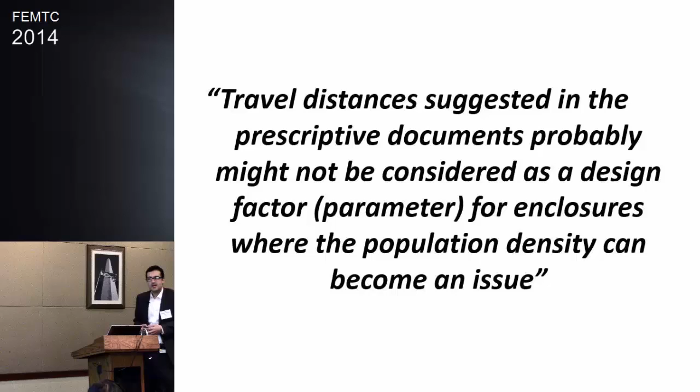Well, so basically what we are approaching in this work is that travel distance, suggested by prescriptive codes, might not be considered as a design factor for enclosures where you have the population as an issue. You see that I'm very careful in saying might not be, because it's, how can I say, a hypothesis.

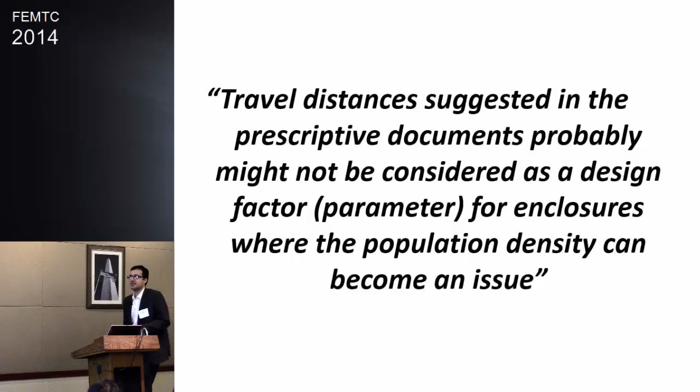This work we have done in 2010, and believe it or not, I haven't had time to publish it. I work as a consultant. Basically, I work installing sprinklers and smoke detectors and starting to do crowd modeling as well. And so it's a good opportunity to discuss this work.

Well, clearly, I think that the paramount word is performance. I think all of us here should believe that performance is paramount. And all these issues are very important, but I'll be concentrating on the time-based analysis, right? Well, clearly, human factors, for example, in nightclubs, you have different kinds of perceptions and awareness, people can be drunk, etc. What I'm trying to say is that although it's very important to talk about human behavior, we will concentrate only on the relation between the people and the environment.

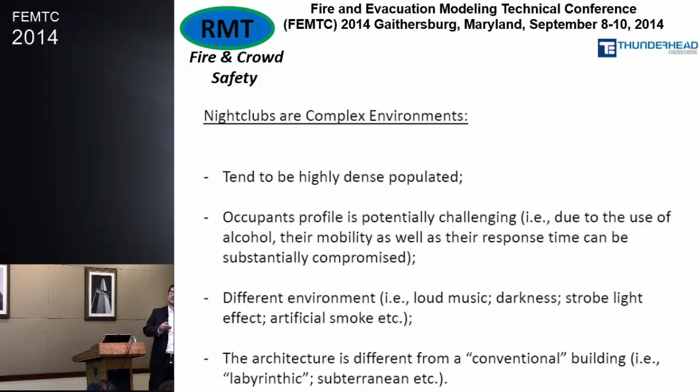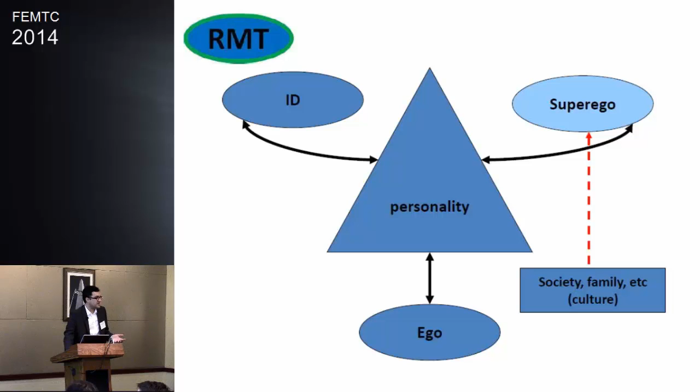And of course, you can discuss later, I know that environmental psychology is very important. There is much research that can be developed, so this can be something to be discussed. Human behavior, if you go into depth, you can even analyze the superego and ego, and this has an influence during evacuation time, depending on the circumstance. But we are not approaching that. I just want to make sure that we are aware of that. It's very important, but it's out of the scope of our work.

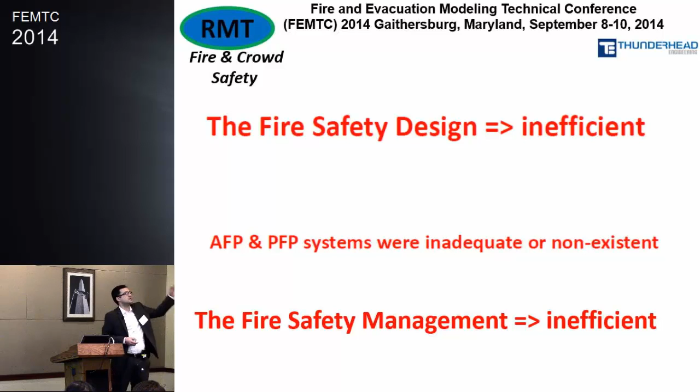So, modeling is a tool, just like a knife. A knife is a tool. I can cut a beef. I can kill myself. It's just the way you use your tool. So, when well used, it can really help a lot. So in many cases, we have seen designs where either the guy used the model wrongly or neglected the smoke detection, sprinklers. So it's not a matter of blaming modeling itself.

And we have so much work that has been produced by NIST and NFPA and SFPE. It's worth reading this as well.

But as engineers, this is very important. Engineers, architects, fire safety standards, they can be the best standard, but they will only recommend a minimal level of safety. And in some cases, the safety might be more complex. And that's where we as engineers should always try to look beyond the black box. So that's very important. Not take this document as a Bible and then follow. Sometimes, it might not be completely accurate.

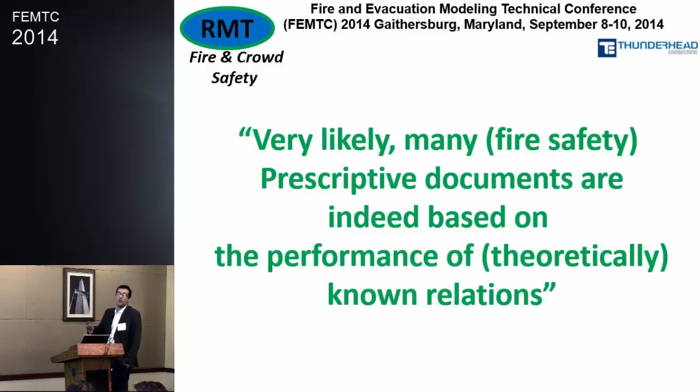Okay, so the relations. Paradoxically speaking, I can also say that very likely many prescriptive fire safety documents can be based as well on performance, you see. So performance is theoretically based on known relations, such as the relation between us, the occupants, and the built environment, and also between all of us and the external stimuli. How I can interpret the strobe or the signs and the fire, the temperature.

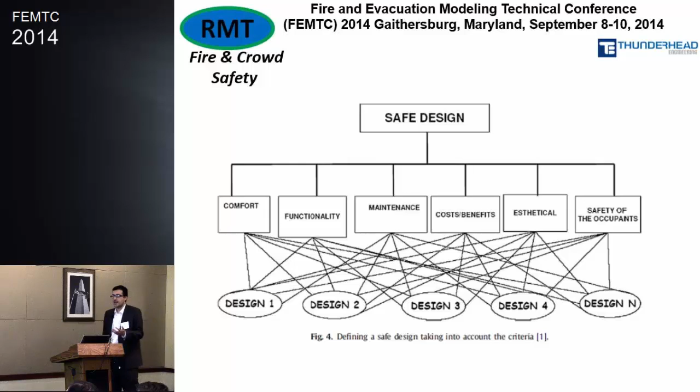And we emphasize comfort, acoustic comfort, thermal comfort, energy consumption, and then we are neglecting fire safety. So we should take into account all these criteria, but have safety as the paramount basis. The reason why I'm saying this is all of us that work with fire modeling, evacuation modeling, active and passive fire protection systems should work together and understand the design, a project as a whole, architects, engineers.

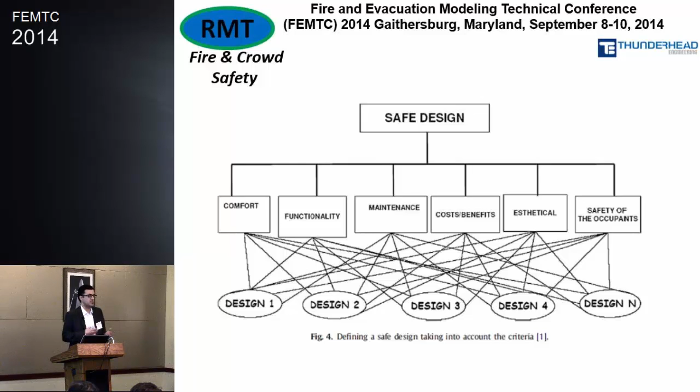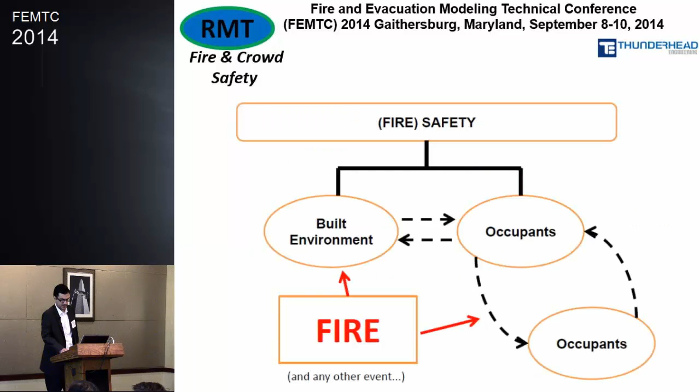Okay, I'll pass that. Our work, although, as we said, human behavior is very important, will be concentrating on the relation between occupants and the built environment.

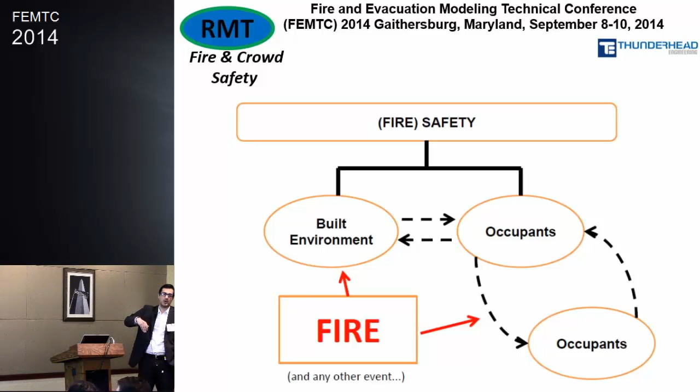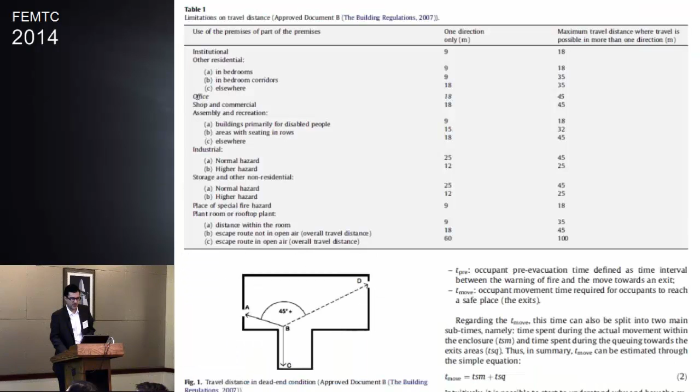All right, so basically, in this study we have used some of our work in the past. We have quite a few works published, journal papers. We have our thesis, where we challenge, for example, the travel distance requirement. And we believe that for highly dense populated environments, we shouldn't sometimes be using this parameter the way it has been used. It's a paper that we have published. You can go to our website, download it and go into depth.

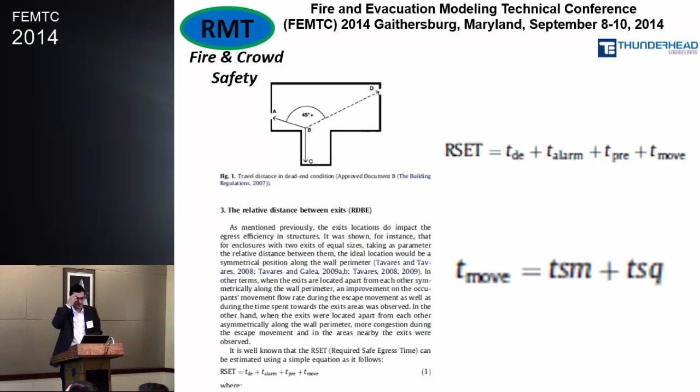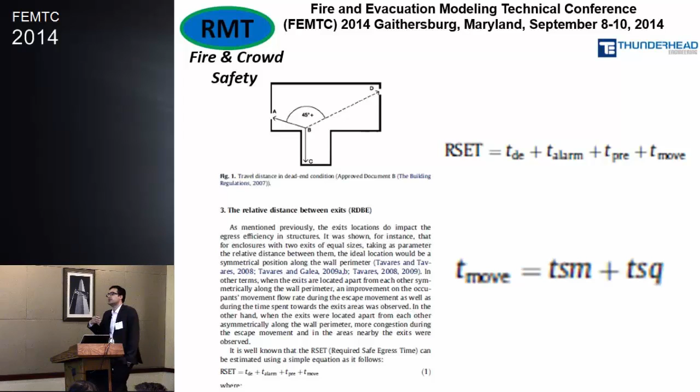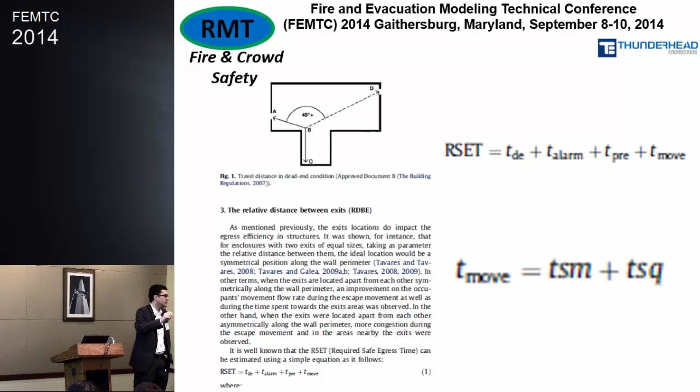So what we are saying is forget about the time of detection, time for alarming, and pre-evacuation time, which is very important. We will concentrate on time to move. The time to move can be understood as a timeline broken down into two small timelines. TSM, the time that we spend during the movement, and TSQ, the time that we spend in the queue. So if you think like that, we can understand that population density will probably play a major role in these relations.

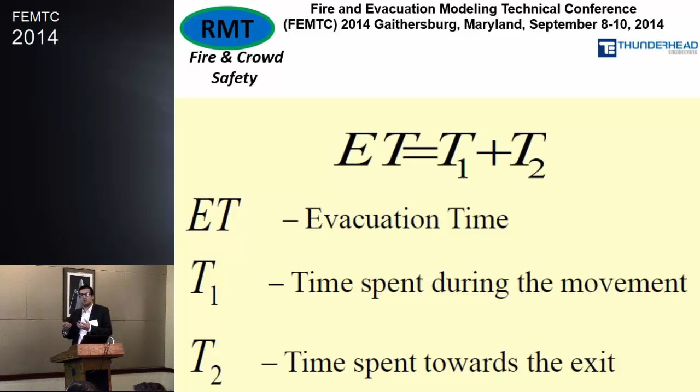There is a work you probably know very well, by Professor Dirk Helbing. He says that faster is slower, and we are going to explain this later on. So summarizing, time to escape, just concentrating on these timelines, is time spent during the movement and time spent towards the exit, the queuing, etc.

I think one of our colleagues here mentioned DOE techniques, and we have done a lot of optimization work based on the Fletcher-Reeves technique, which is a gradient-based algorithm, and also PSO, a genetic-type algorithm, and tried to find the optimal place for the doors. We have done many, many cases. It's also available as well.

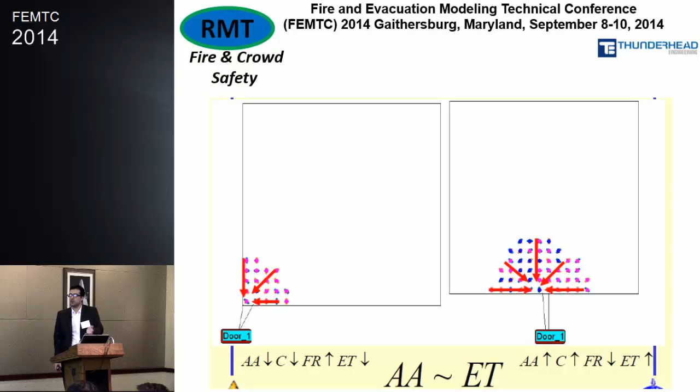You can Google that. But basically, it's well known, but we found and proved that having a door in the middle of the wall is worse for highly dense populated environments. Having the door in the corner will actually improve your evacuation time performance. So we think that when we increase the area of the arc towards the door, we increase the congestion and decrease the flow rate, and then increase the evacuation time.

Okay, so people movement models, as I call them, include evacuation models, pedestrian models, etc. I'm saying this because you model the movement of people. It doesn't matter if it's an emergency or circulation. So you can use them for fire safety engineering, urban planning, crowd safety engineering, etc. There is quite a lot of discussion on LinkedIn about this terminology.

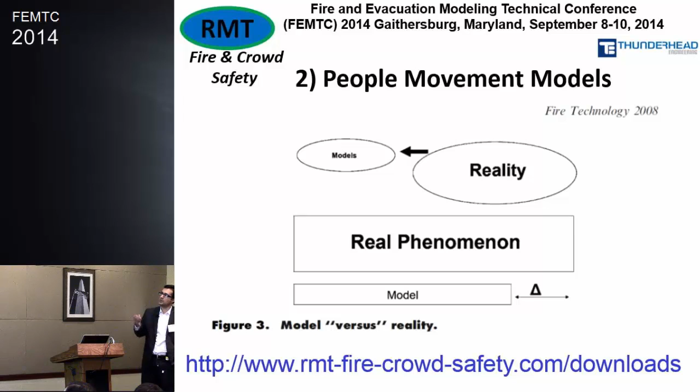Now I want to talk about this issue quickly as well, about the model itself. Well, any model, any function, is attempting to represent reality. And we will always have that delta of uncertainty. That's clear. But if you have a good model, validated as our colleagues have been discussing, and checked, and if you have the understanding about the phenomena that you are modeling, we can reduce that delta substantially. And that's our work as engineers, to look beyond the black box, to minimize this delta of error as well.

So we have some more stuff published. What I'm trying to say is that there's an expression in English: rubbish in, rubbish out. You have these whole protocols which are very important, but the understanding of the phenomenon itself, either fire or an evacuation or behavior, is one of the steps. Then you have to understand the model itself, and then you can model and interpret, just like statistics. You can use it for good or bad.

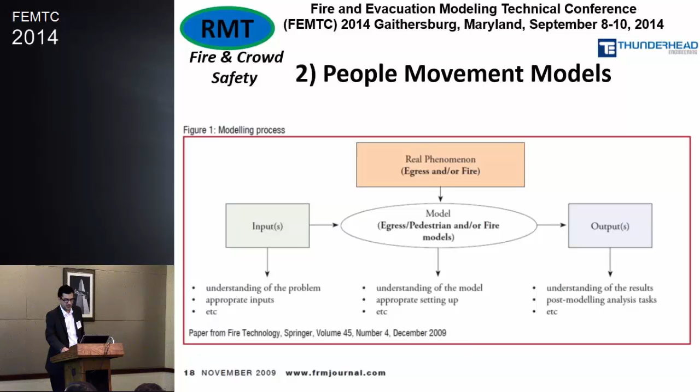So another thing as well is that we can limit our variables. Because if you consider many aspects, well, if you think in a very metaphysical way, life is non-linear per se. A lot of phenomena are non-linear. We try to make it linear to make this easier, right?

So the equation F equals m times acceleration is incomplete, because there are other variables such as air friction and many things, but it works well. If you have an understanding of that function, and if you insert good variables, you can work well. So the analogy I'm making here is how important it is to include some variables or not.

So this is something that maybe some of you researchers could think about from a perspective where, in the commercial field, we might waste time trying to research how ants behave, for example, and make an analogy. It's nice, but it's very virtual, and we have seen these kinds of things happening, with people using this approach for real projects. And because of that, many engineers start to say these kinds of models are mumbo jumbo, they don't work. And we understand that, because it lacks credibility.

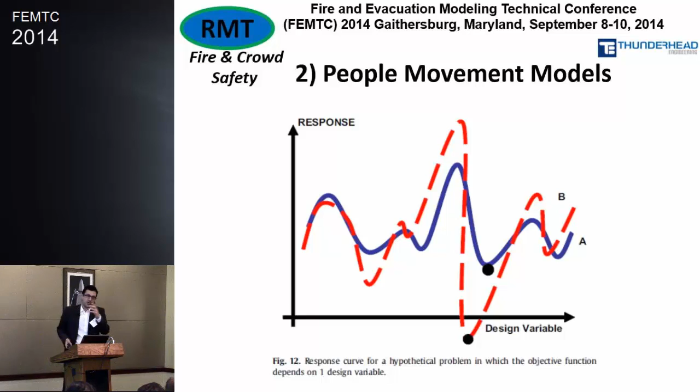So, an analogy with optimization. To know, for example, the global minimum of a function can sometimes be impossible if you have many variables. But if you restrict your constraints, you can find a local minimum, which can be okay as well.

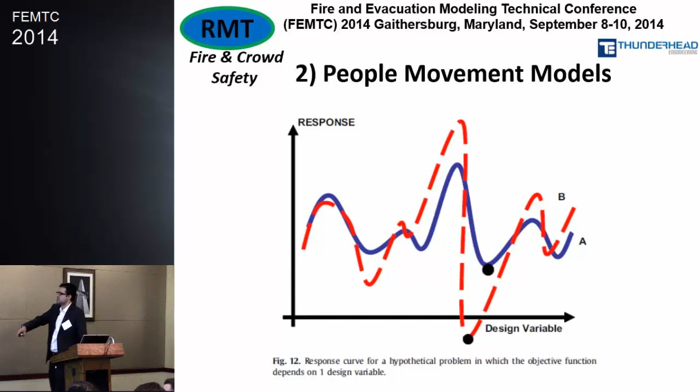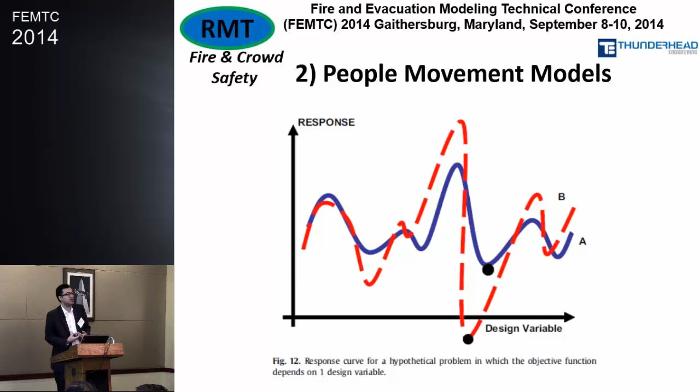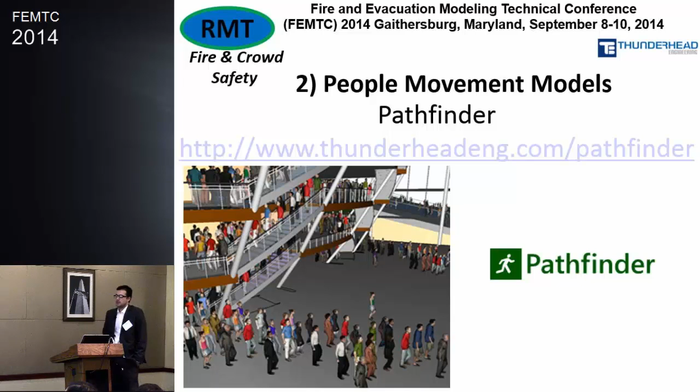Okay, anyway, the model used for this work is Pathfinder. It's a well-known model, well built and validated. You all know this model. And regarding this theoretical approach we've been talking about, there's also a document in Britain that we helped develop, explaining that we can use evacuation modeling as well as fire modeling to help develop the fire safety design or do the analysis for fire safety management. So they are tools. They are tools.

Okay, so let's go to our theoretical work. Basic. Really? Gosh. Okay. Jesus. Okay, I'm going to speak now.

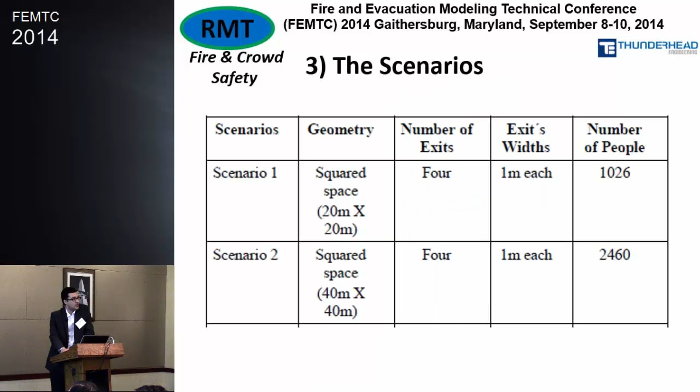Okay, so I have two scenarios here, 1 and 2. It's a very simple case. We populated them, crowded, and we want to check how the door's location would impact the performance of the evacuation.

So that's the scenarios here. It's just simple, you can go into depth on the paper, it's explained better. But basically, we found that the place where you put the door in the middle increases the evacuation time.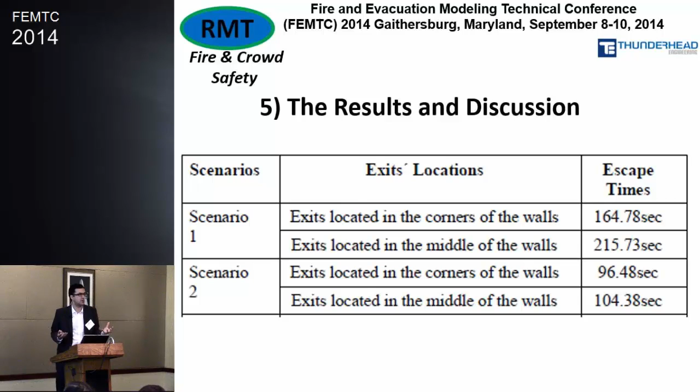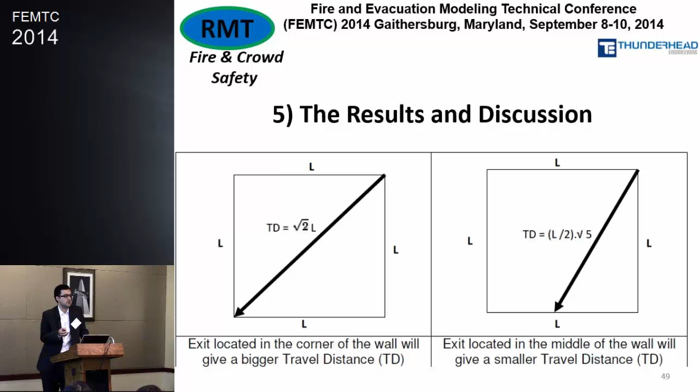And in summary, what I want to finalize is that the concept of travel distance is based, in a general way, on minimizing the distance to the place of relative safety. Well, it works, but there is a variable - the population density - that is a critical factor, and it will completely impact this law, if I can say so.

So we tend to think it's better to put the exit in the middle because it's shorter, more visible. But actually, for crowded environments, it's better to have it spread so people can evacuate in a more ordinated flow.

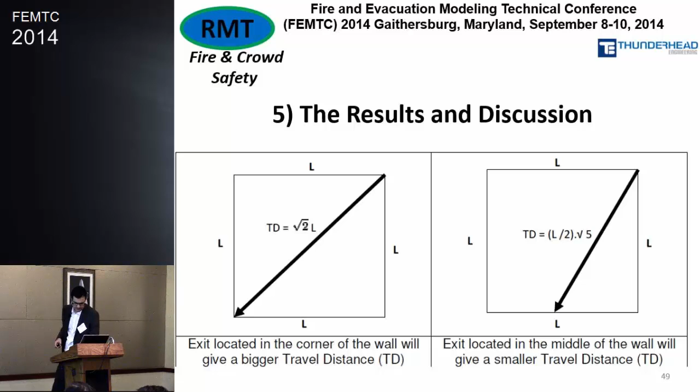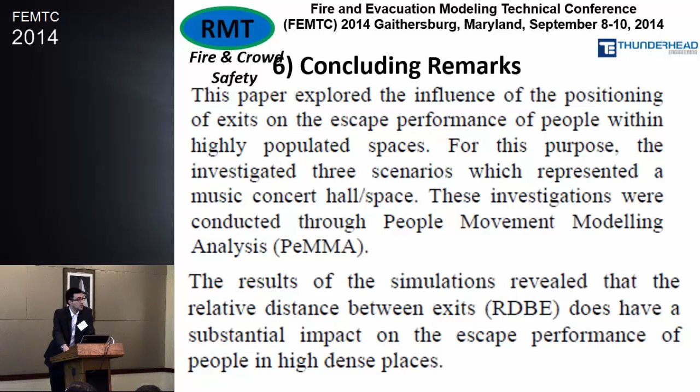Well, so that's the paper. That's actually showing the importance of the RDBE, yeah? And modeling can be a tool for that. You can find more about this work on the thesis. Just to finish, I'll give it.

If we ask ourselves, in Latin, quo vadimus - where are we going - in terms of the modeling process, I would like to take the liberty to propose or mention something.

That's the way I think. I might be talking, but fire safety or safety, I cannot distinguish that from comfort. So it's all the same.

And we have this green building industry now, which is big everywhere, sustainability. And I think in a commercial perspective, if we unite ourselves, we can prove and convince or explain to clients that investment on fire safety, including modeling for fire safety management packages, is really beneficial for the environment.

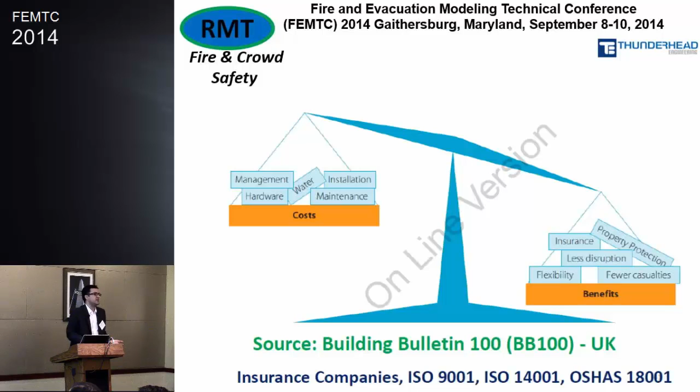The reason why I'm saying this - I'll pass that, just to finalize - is that you have these codes now which are requesting, for example, people doing simulation for air quality, using thermal comfort as well, and they have been used very powerfully.

And I asked myself, why? I mean, I started doing modeling - now I'm more a consultant, but I started doing modeling in 2003. And I have to say, I didn't see much evolution, at least in evacuation modeling specifically, in the commercial field.

And I've been asked, why is that? These guys from the energy, environment and BIM models, they are really doing well. And I believe it's because they are organized themselves.

And probably we should look at what they have been doing, creating an association or certificates and things like that. Something similar to what we have for smoke detectors - you have to have the device certified, the contractor who installs it should be certified, maintenance too. So something similar with modeling, I suppose.

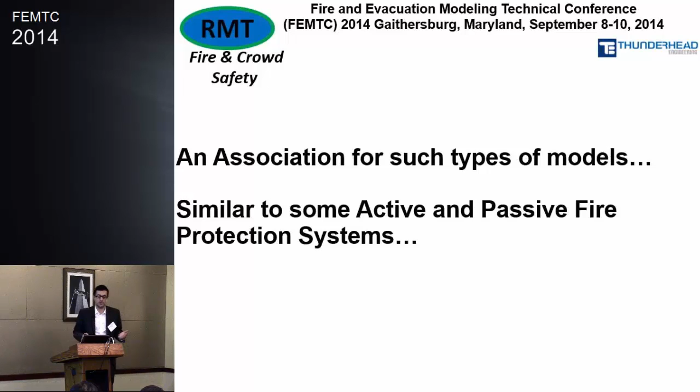Okay, that's a very important cause. If you want more information, I do apologize for being quite quick. Everybody's quoting people here, so I think I should quote two philosophers who used to say that life is very short, there is no time for fussing and fighting, my friend.

So I think fire safety and all the other building construction disciplines, and architects, we should work together because it's a win-win situation. Safety is going to be promoted, and we can also make more business. It doesn't cause any harm. So, okay, thanks.

Thank you. Do we have questions?

You were talking about the location of the exit, and the location in the corner being beneficial compared to the exit being positioned in the middle of the wall, given high density. Did you look at the threshold of population density that moved it from one place to the other? Was there a point at which the density was sufficiently low that the travel distance mattered, so they could change there?

Yeah, that's a very good point actually. Towards the end, some people decided to change, but was there a density threshold? Was there a point when the population density was sufficiently low that there was no difference between the position of the exit?